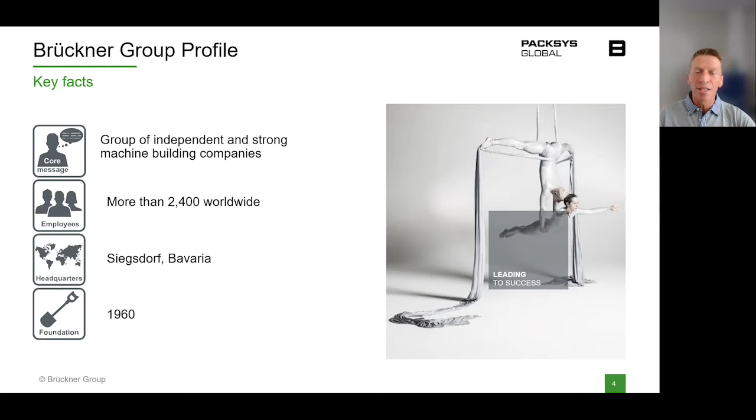And I'm pretty sure all of us are on a daily basis in touch with the products made out of the Brückner Group machineries, whether it's for electronic components, cosmetics, healthcare, personal care, food packaging, and last but not least, also for beverage packaging.

PackSys Global, one of the 4 companies in the Brückner Group, has 4 divisions. We have been in the business for about 50 years, and not long ago we set up the new division organization. So we have the divisions Health and Pharma and Premium Cosmetics, mainly in the tube sectors, for decoration as well. Then we have Beverage and Specialties. That's where the closure business belongs. And we have the 4th division, which is the customer service for all the 3 other divisions.

We are globally set up. We have our platforms in the US, in Portsmouth, New Hampshire. We have in China, in Suzhou, our platform. We have in India, in Mumbai, our platform. And then we have representative offices in Japan and Brazil for the Latin America and Japanese markets respectively.

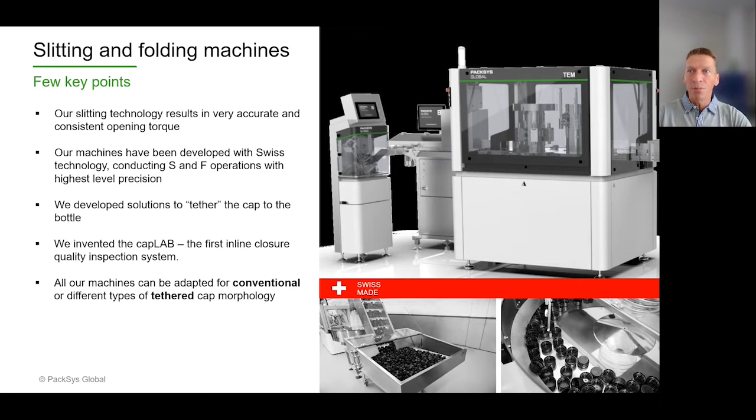And of course, as I said, tethered closures - we had to find a way so all the existing equipment can be adapted also to tethered. That was the driver for us to develop technologies which we call today experTether, smarTether, and CapCompass. With these 3 technologies, we are able to serve the tethered market on a good platform, whether it's for oriented slitting, which is Cap Compass, Smart Tether as a hybrid solution, or experTether, where we have contour slitting. So whatever contour we want on the TE band, forming a hinge, creating a tamper evident band, that's the technology to go with. This is exactly what we implement in the machine at TEM, which we have at Drinktec.

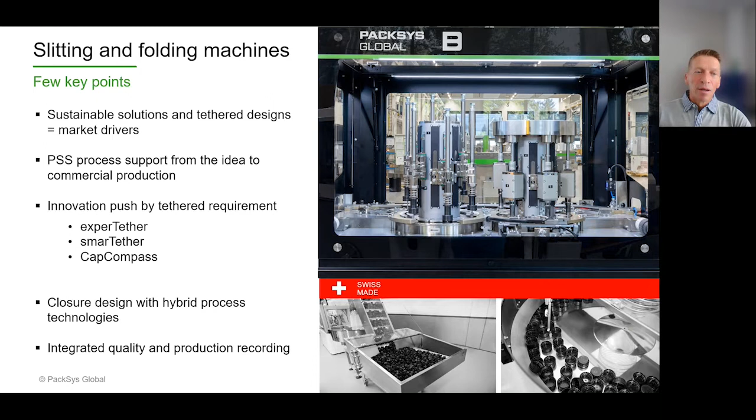When you talk about closures, tethered closures in particular, we talk about all kinds of closures which come in various shapes, but the main functions remain the same. The sealing should be the same. We want to prevent entry of any micro particles, and protect against CO2 loss. And of course, the tamper evident band needs to be there as well, with the same functionality as we know from today's non-tethered closures. But the consumer experience also wants to have the same behavior - with the grip zone, the radius, all this convenience, it should flip away in the right direction. Since it's no longer detachable, it should be in a convenient direction to get out the content.

And of course, the industry, the manufacturers, they want to have their requirements met. The investment should be as low as possible to transition from standard to tethered closures. For the filling line, it's important to have not a major change in the capping process. Efficiency and zero defects - all these factors are highly sensitive for the converters and for the filling lines.

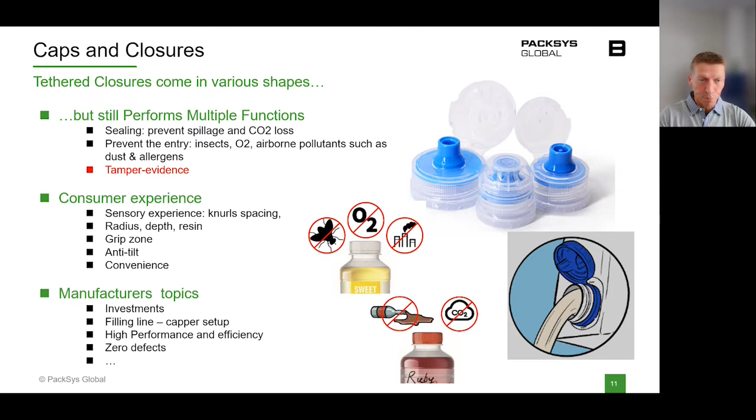Today we know two technologies. On the left-hand side, we know the slit hinge. On the right-hand side, we see the molded hinge. This is the product from one of the global major brands. On the left-hand side, we have a 500 ml bottle, whereas the other one is a 300 ml bottle. So it's obvious there are different technologies possible.

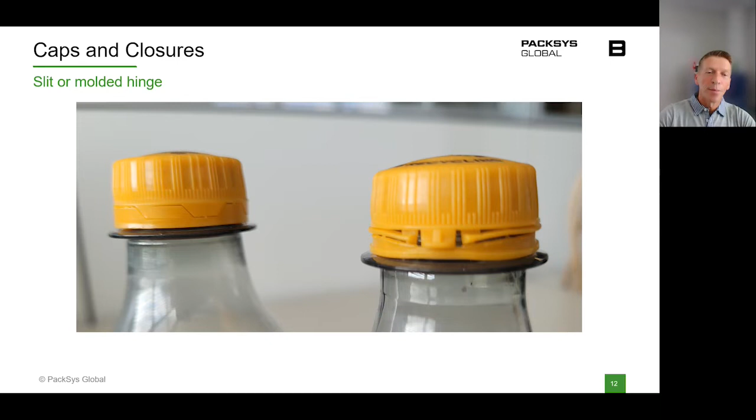Let's talk about the technologies first, about Cap Compass. That's what we developed mainly for the carton industry, for multi-piece closures which are assembled with a cutter, with a spout, or just with a spout. It requires a defined hinge position, and this is what we do with movable spindles. We go inside the closure. We have the orientation sequence before we then start with the cutting right at the point it's foreseen, or it's ideally positioned.

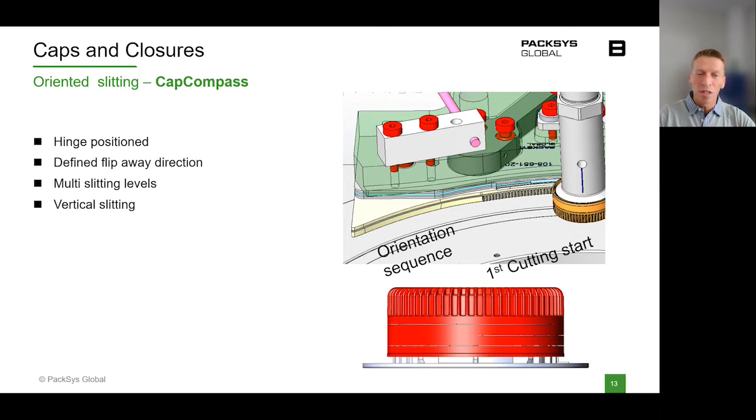It's possible to have this with vertical slitting, multi-level lines, 3 lines, 2 slitting lines, whatever is needed, we can handle it. The second is experTether, and the experTether, that's a technology 5 years back really nobody was thinking about, where we have the contour slitting. So each time a mandrel passes along the outer tooling, the slitting knife, it's fully synchronized.

We know it from high-speed machines, where we've delivered a good number of machines which are in commercial production already. This is the most seen technology today we deliver in the market for the beverage industry, for PCO 1881, for the GME 30 point whatever. This is the future.

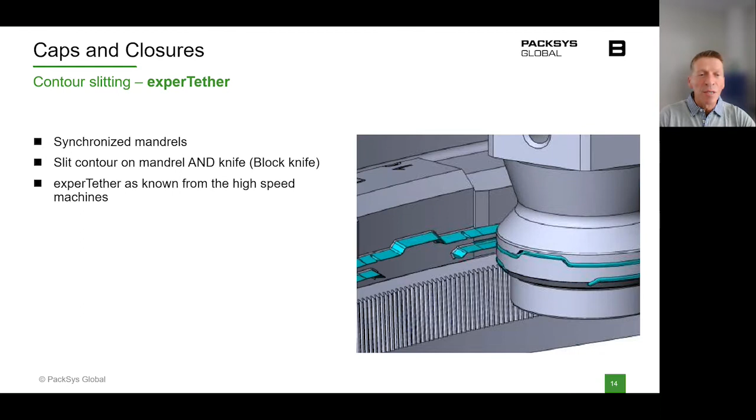A big advantage is with the third technology, smarTether. So Smart Tether is kind of a hybrid solution between Expert Tether and, let's say, the standard we have today. It allows our customers to run the same closure design for tethered, but also as a standard. The changeover from tethered to non-tethered is done in 3 minutes. Changing the knife, it's there.

It's thanks to the modularity we have in our machines, we have a very, very quick and very low cost, or low investment, changeover between the two solutions. The same closure design, but different technology in the slitting process. This for sure is a big advantage if we go with post-molding slitting compared to the slides in the mold.

So the TEM Plus in general, I have to highlight again, we have one knife that cuts all the closures coming out of whatever it's a 96, 72, 64 cavity mold. We have one knife that forms all the bridges. We are very flexible on that machine with the sequence. In the field we can switch between folding-slitting, slitting-folding, or just slitting or just folding. That's a modular machine base where we have all these opportunities.

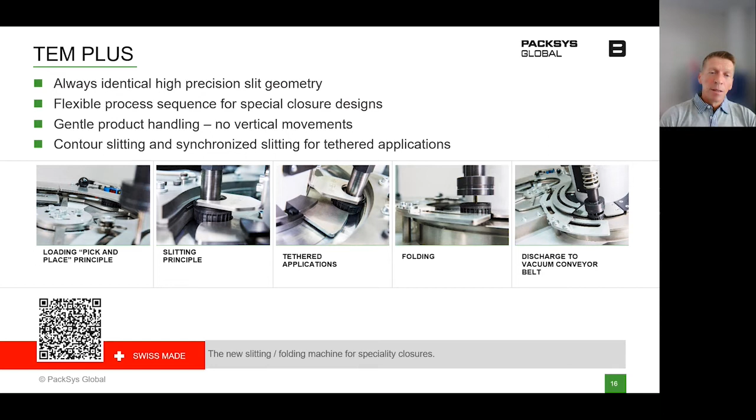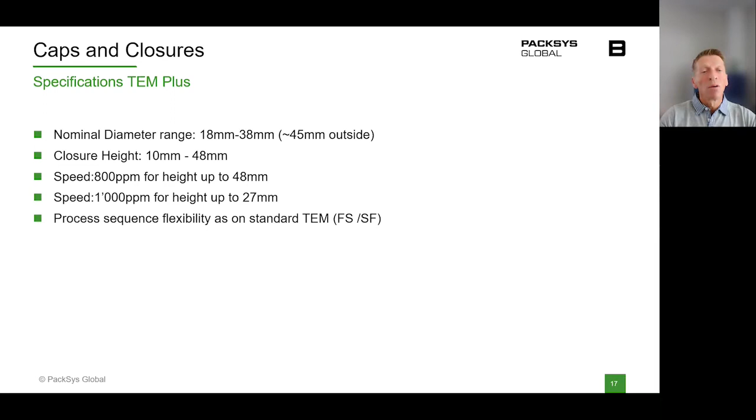It is a very gentle product handling, so the closures going inside the machine are not moved in a vertical direction. In other words, we are moving all the spindles. That's the principle on the TEM machine. The specs for that machine we are displaying at the Drinktec: we have a nominal diameter up to 38. I think that covers most of the beverage container closures. The height is there. We have different speed modes. The process sequence, as mentioned, is very flexible, whether folding, slitting, or whatever is required.

The second point we will display at the Drinktec is CapLab. Okay, some of you might say, hold on, that's the device you displayed at the K. That's correct. 3 years ago, we were the first in the market having this testing device in line with closed loop operation, feedbacking to the molding machine whether we are in the target range or not with the band breaking strengths.

We have various patterns, whether it's according to the cavity or according to the spindle of the slitting machine when it's slit, or by time, by volume, all is adjustable. We can adjust the pattern, whatever is needed. All the measuring data are transmitted to the system. Either we provide the platform, but more often there is already a system in place in the manufacturing hall.

The big advantage, why did we bring CapLab onto the line? We always have the same conditions. So the crystallization of a closure is at the same level. The temperature of the closure is at the same level. And we are independent of the mood of the operator in the lab, where normally these tests are done. We interviewed a couple of manufacturers to see how it's being done, and we found out there is a big difference between the individual manufacturing companies in plastic closures.

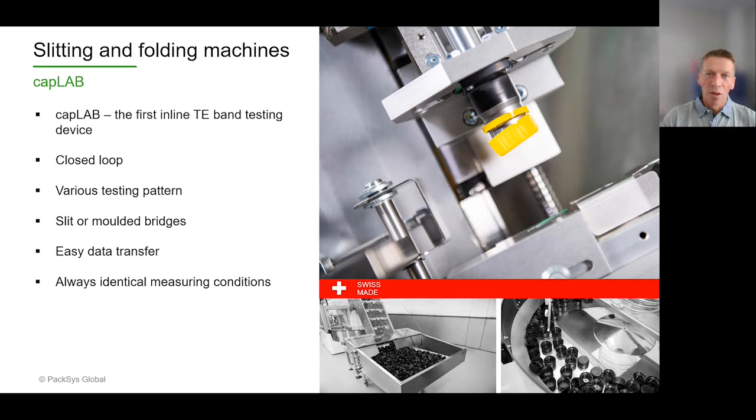So just generic, what we do, we have a feedback to the injection molding machine when we just would run without slitting. So we would feedback, hey, cavity number 32, there is an issue. The strength is not in the target zone. So it can alert the operator to close the cavity or do maintenance work.

Or we can feedback to the slitting folding machine and say, okay, spindle number 4, there is an issue. We should think about it and measure it again or whatever. So we have all these analyses. If in general the strength of the TE band separation is getting too high, we can increase the temperature of the knife and bring it back in the target zone. So we have this closed loop feasibility to run the line without human interaction.

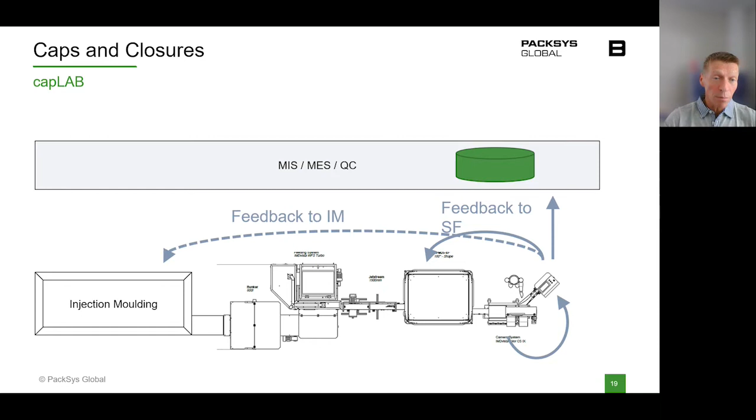So this is what we had, and this is what we keep. We just thought, okay, let's go with CapLab Plus, and we did some more processing or testing methods. Some measurements are done there. So of course, tethered was, when we started with CapLab, not the major goal to implement. So today, I think we have to. Tethered is the future, at least in the European market. Let's see where the journey goes on after Europe has converted in about 22 months.

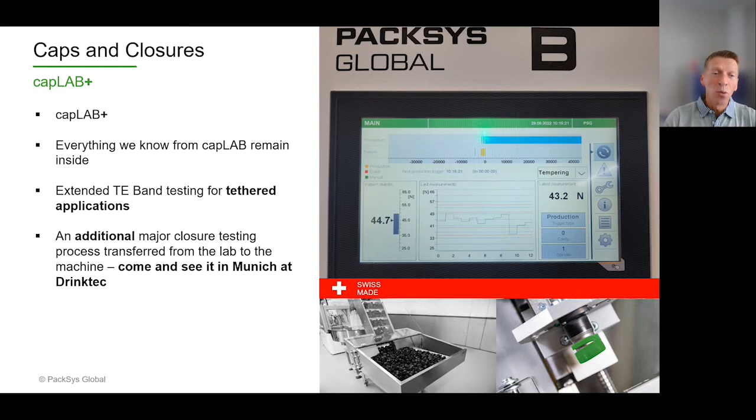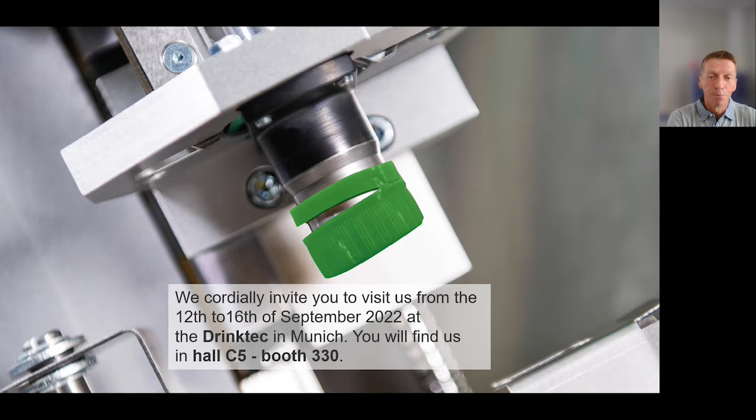Thank you, Uli. That's very interesting. And as you say, I think sustainability is the main driver today. I expect we will hear more about it, not just today, but over the coming weeks, months, and years.

And now for our second presentation, I am delighted to introduce Mr. Jacopo Bianconcini. Jacopo joined Sacmi Group in Imola, Italy, 21 years ago. He graduated in management engineering at Greenwich University in London and added a master's degree in marketing, innovation management and digital transformation at SDA Bocconi of Milan and Columbia University, New York. After gaining experience as an area sales manager and key account manager, he is now based in Sacmi's Imola headquarters, where he is directly responsible for marketing and product development activities within the rigid packaging technologies division. Jacopo, we're very much looking forward to hearing what you have to say today.

Over to you. Thank you, Ruari, and hope you are hearing me properly. If there is some noise, it's raining cats and dogs here. Italy is said to be the land of sun. It was in the last 3 months, but not in these days. So I'm just trying to take control of the presentation, which I guess is working perfectly.

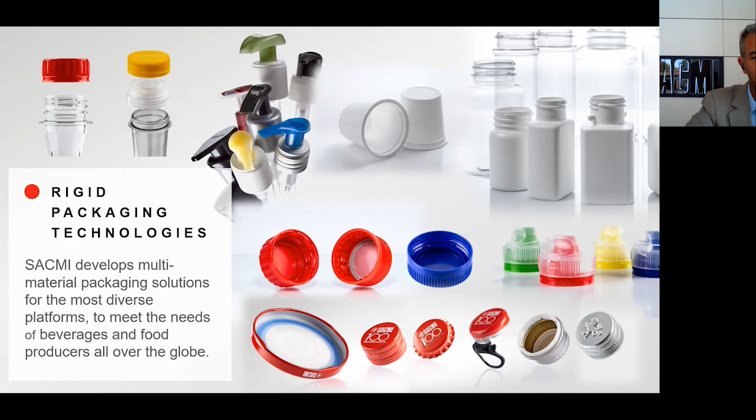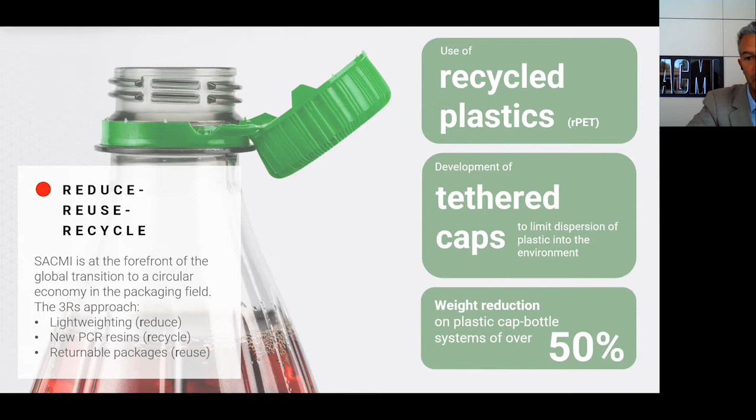Again, sustainability in our industry is known in view of the 3R, which is reduce, reuse, and recycle. We will show at the exhibition how we use rPET recycled plastic in our injection preform systems. There will be a section at Drinktec only on tethered caps and on our slitting solutions, like Uli presented before. Not by mold, by slitting. And also our lab, certified by the major brand owners, which designs preforms, caps and bottles, and is aiming at a really important weight reduction. We reached about 50% in the last decades.

But focus on what we will show at Drinktec. The presentation title is How to Translate Digitalization in Closure Manufacturing, in this case, into a real economic advantage. And there are three main topics. One is the generation of data, one is elaboration of data, and one is how to turn this into profitability. So let's start with the generation of data, which is the section on which I will spend most of the time of the presentation.

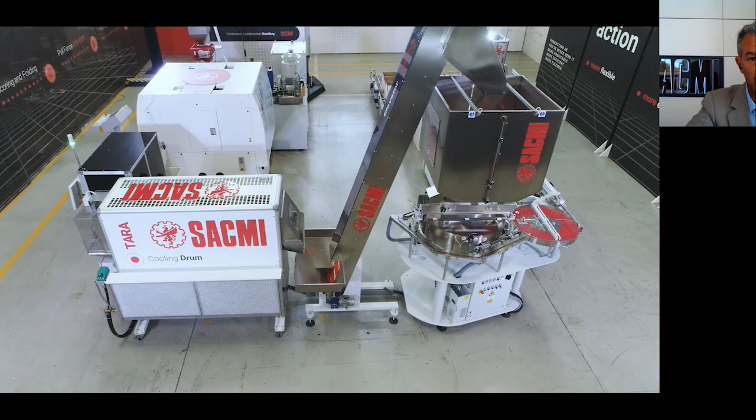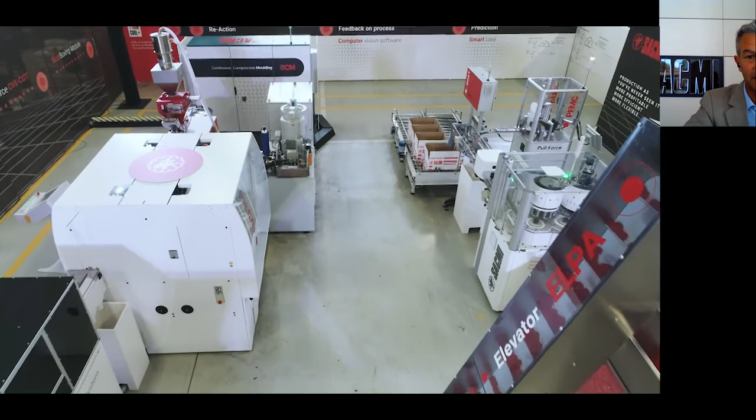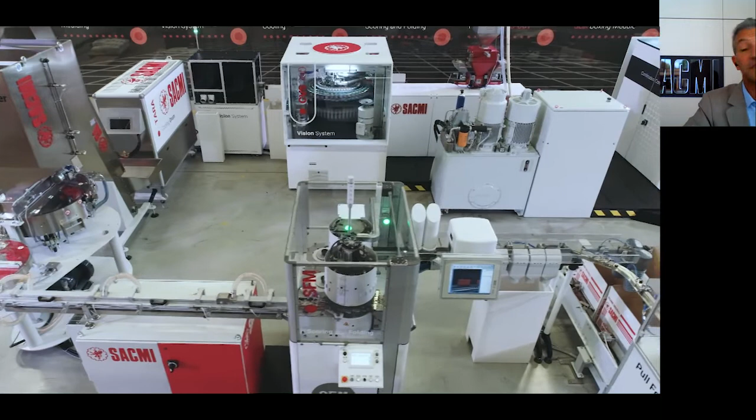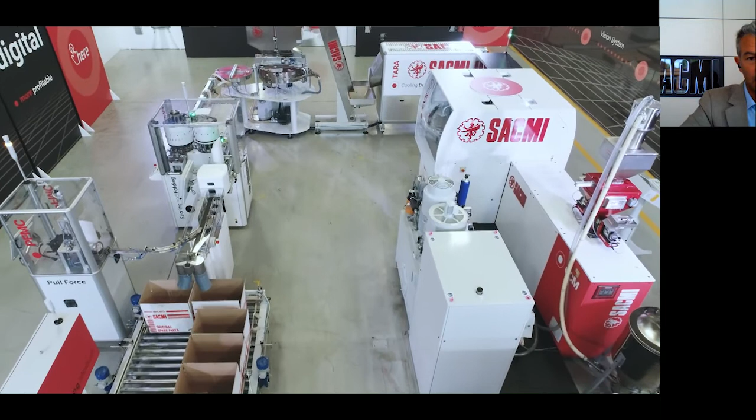What we are talking about is this line which you see here. This is exactly the line which will be presented and working, actually producing caps at Drinktec. How it works is the production of plastic caps by compression. You have an insertion turret, which takes the pellet dose from the extruder and puts it into the main turret, where it's actually molded and cooled. Then it goes all the way down into the scoring and folding process. Again, this is the machine we will have at Drinktec.

How to generate data: through a package which we call the Smart Pack, which is a sort of onboard hardware and software which maximizes flexibility and real-time adjustment of the machines according to the data and the process they figure out and detect during production. It's a package which comes as a whole and consists of four main aspects of the process. One is the pellet insertion, which in compression technology is a key area. One is advanced management of materials control.

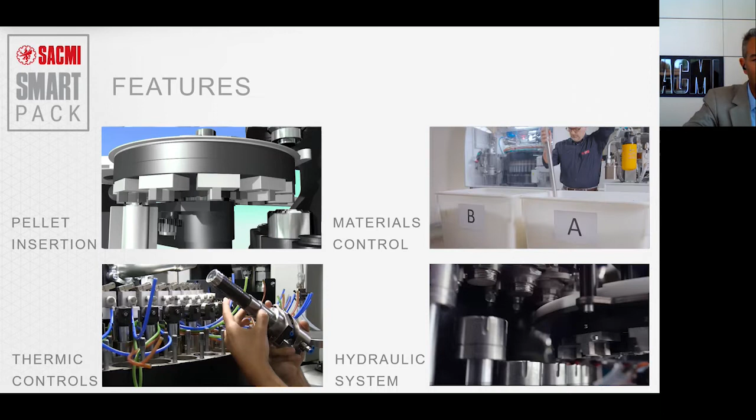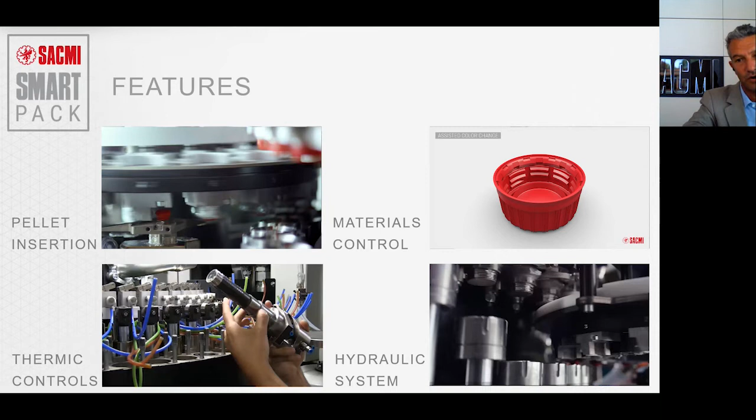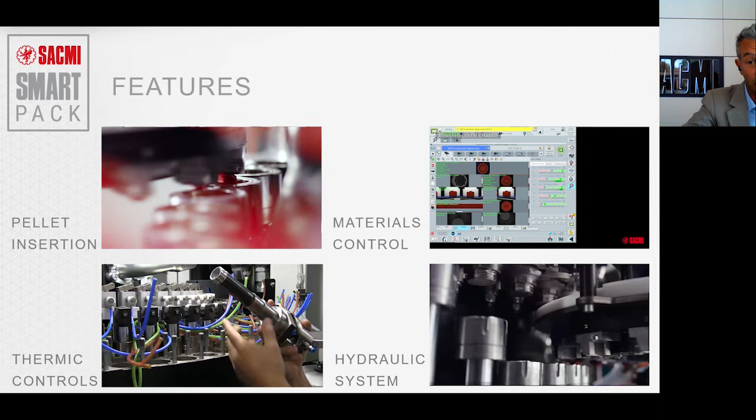We will also perform at the exhibition how, changing from one material to another, the machine actually detects the material automatically and then sends an alert. Then we will talk about thermic controls, the temperature control system in the mold and in the machines as well. And on the hydraulic system, we all know that oil is sort of the blood of the machines, and it is very important. We have systems able to detect in real time in the machines if there are particles, the chemistry of the oil, and we'll talk about this later in this presentation.

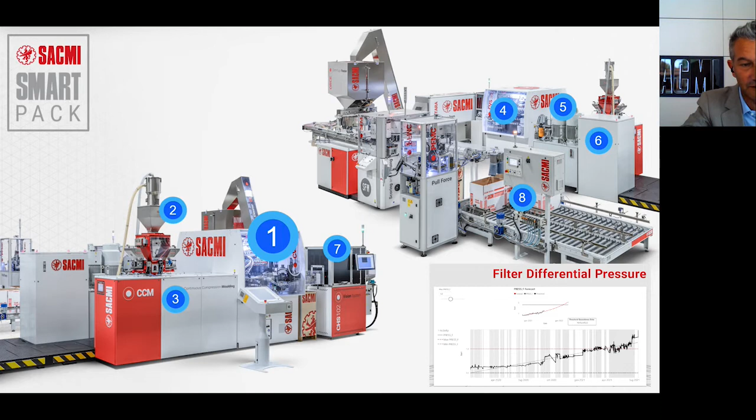So let's start with the pellet insertion. If hopefully the presentation will move forward. Here we go. There is a video also here.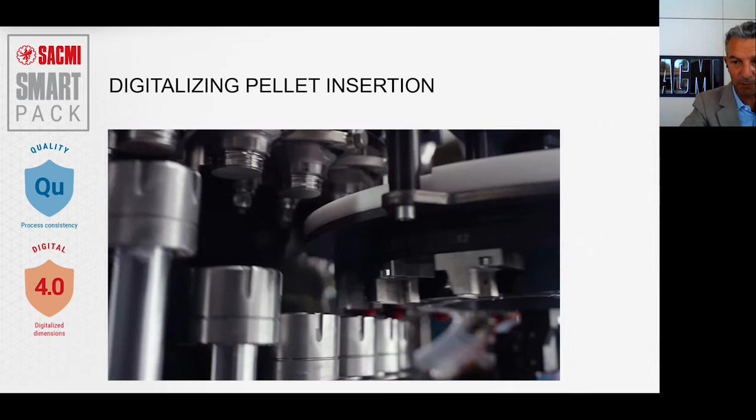So it's like playing basketball. You have a ball and you have to throw the ball in the basket and hopefully center it. This is the target of the insertion turret. We have a set of positions that, with a pinhole and compressed air, take the dose cut from the extruder and place it into the mold. Here we are able to digitalize the position of each dose in the mold. This means that you have statistics and behavior, and you can detect if there is a drift in the process and act before the problem occurs.

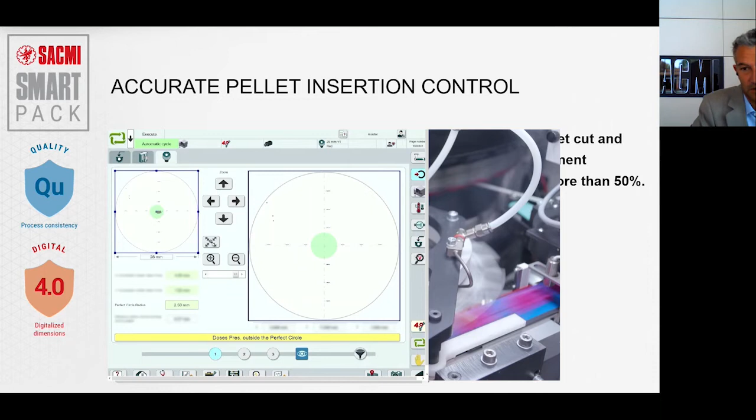We have real data that, especially when you have to change materials on the same cap or colorants on the same cap, or even change the size, you have a complete changeover of the caps, then there is the process of setting the parameters. Okay, you have your recipe downloaded in the machines, but always you have to check that. With these sensors and knowing exactly what you are doing in the machine, and at the same time what is happening in that part of the machine with these actual controls, you know exactly what is happening in real time

and adjust correctly. And we discovered that you save half of the time in the setting time moving from one recipe to another one. What does it mean? Less scrap, more production, more money at the end.

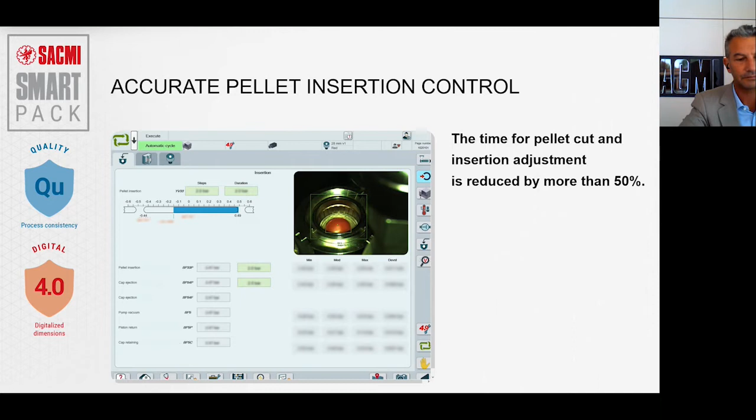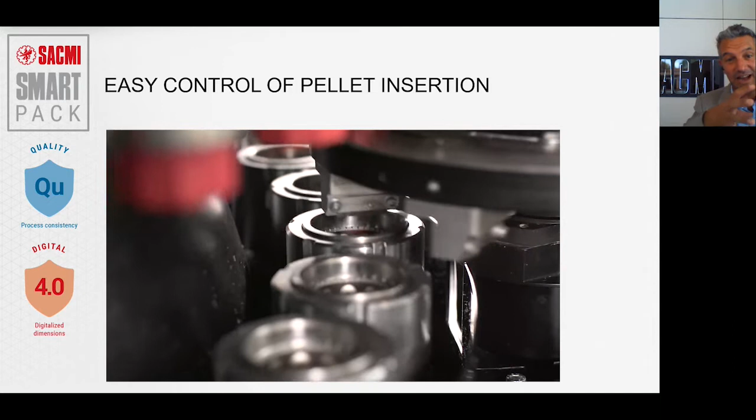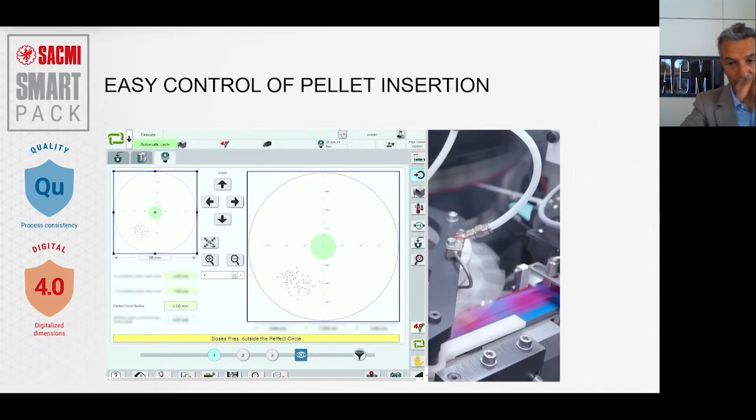Again, easy control of the pellet insertion. Here, with this video, we will show how you can spot a complete drift, not only in one position of the insertion turret, but something happening as a common parameter in the process. You see that all those from every insertion point are drifting away from the center. So something is happening. Maybe there is something wrong in the insertion time, something wrong with the speed of inserting the dose. And again, you are actually knowing what is happening in real time, make an intervention and solve the problem, because you know in advance what is happening.

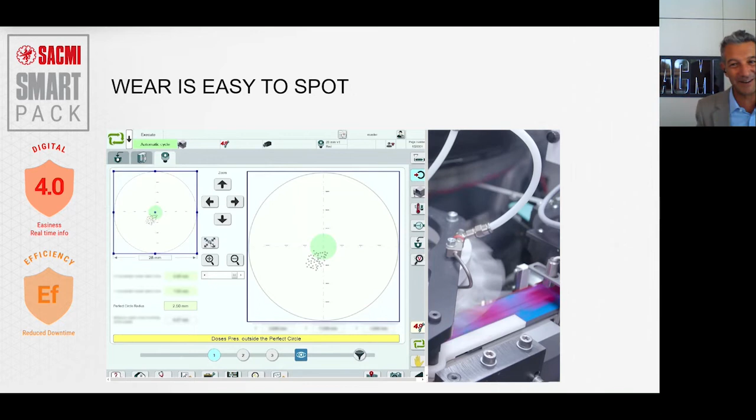This has to do also with the wear of materials. I cannot be precise here because we have a patent on this and it's a very important know-how we have. But I can tell you, it has to do with the pressure of the chamber of the pistons placing the dose down. And we actually can know exactly which situation is happening and if there is wear or not. So we can act on this, moving the time of the intervention for maintenance. It can be earlier than foreseen by the manual or later, hopefully later. And we'll see how this can have an economic advantage later on in the presentation.

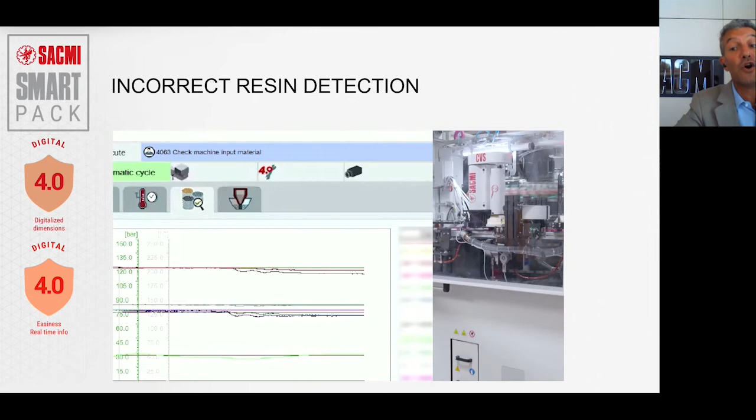So we leave the pellet insertion. Now we move into the following section, which is very interesting: incorrect resin detection. This is what has actually been done in real terms, moving from the hopper from one resin to the other resin. It's an algorithm patented by Sacmi. It has to do with the rheological properties of the resin, and the machine detects that it is not the same resin as in the recipe and gives you an alert. So again, you know exactly when the problem is happening, and you don't waste scrap, time, or production, and again, we are back to economic advantage.

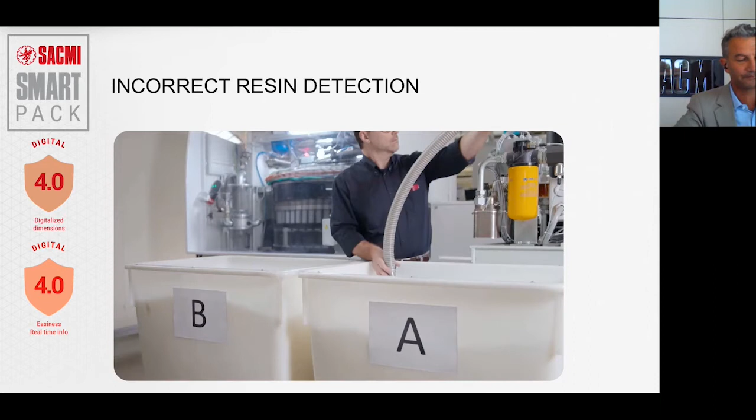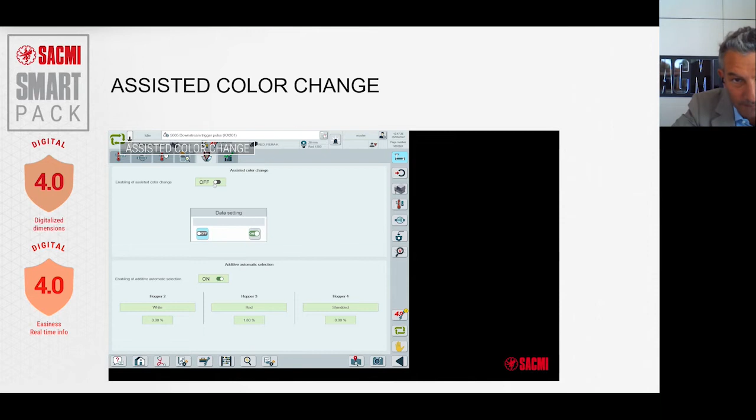Color change. Our technological and technical department prefer to call it assisted color change. I will call it automatic color change, provided you have the proper material and the proper color in the hoppers. But then just by pushing one button, I'll show you here, exactly that button, the machine automatically performs the color change.

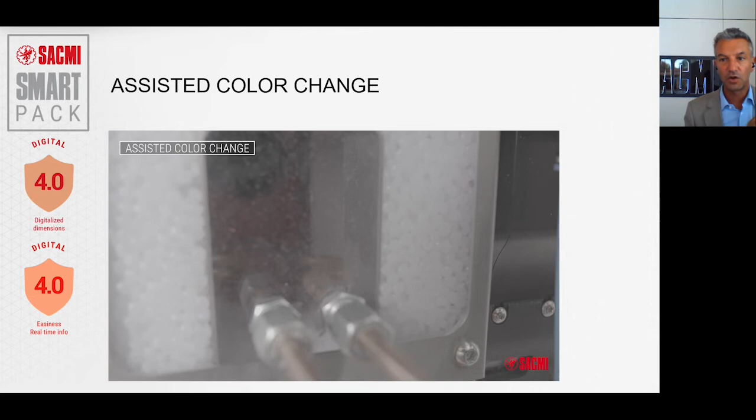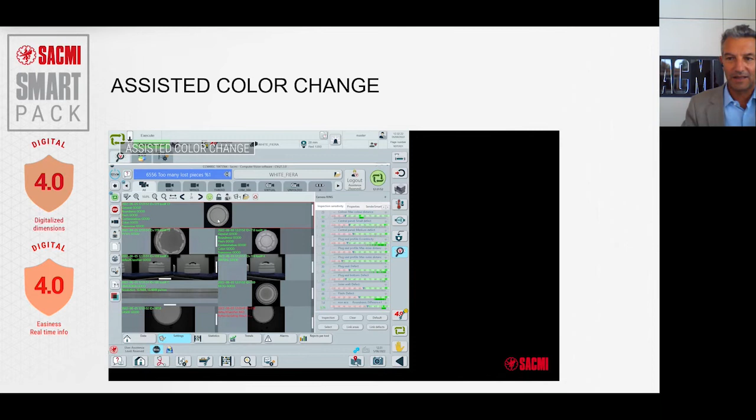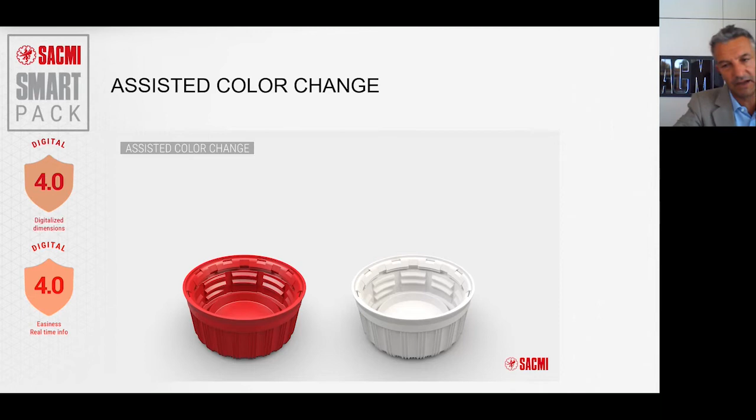The continuous compression molding machine actually works in conjunction with the computer vision systems which detect the color of the caps, the transition of the color of the caps. So the caps go into scrap, taken out of the production line, but then automatically the machine detects when the color and the dimension of the caps and all the data of the recipe are met. And in that case, no more scrap, automatically back into the production bin. So again, you save a lot of time here and no errors, no human errors.

Two other parts on data collection are important. As said, the oil is the blood of the machine. So we have sensors and devices to analyze the quality of the oil, both in physical terms, dust or whatever particles, and in chemical terms, so the decay of the oil. And again, by analyzing this data, it is possible to properly program the maintenance intervention, knowing what is happening. Maybe postpone it compared to the table, because it depends on how many hours of production, which kind of caps, the maintenance done before. A lot of data. You know exactly what is happening in the machine in real terms.

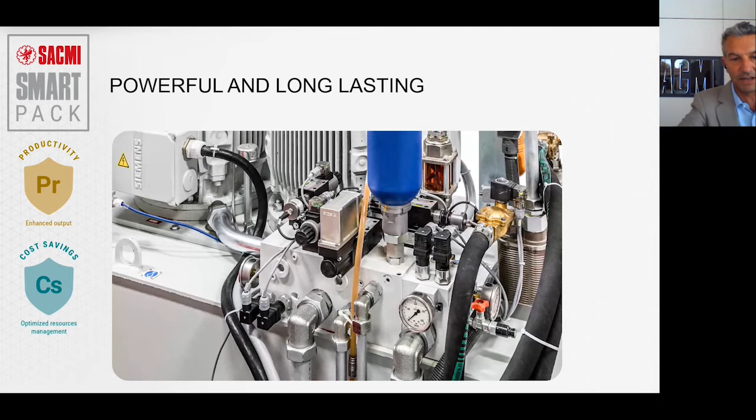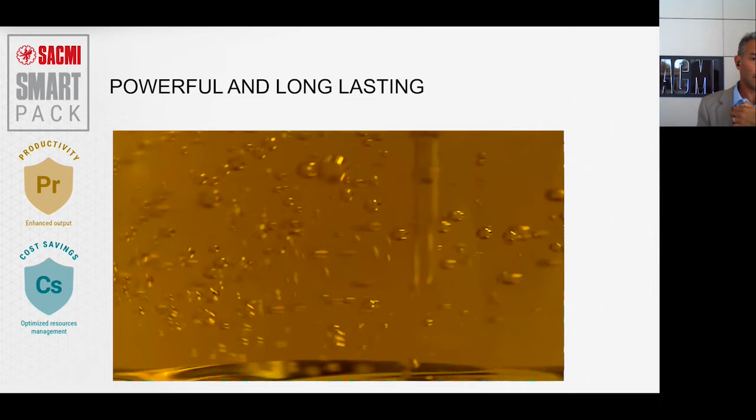Finally, on collecting data in a rotary machine, the rotary joint is, again, a key point. And we have, again, sensors and systems to know exactly the health of all the gaskets.

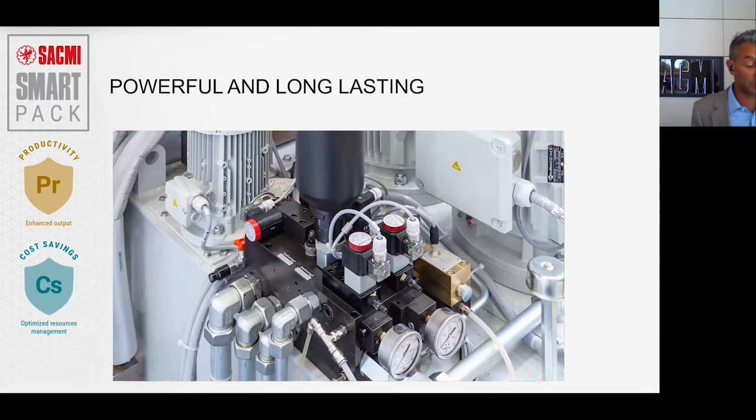So to check if there are leakages and how the situation is, again, to program the maintenance. It's important here that we have a system also for the accumulators. If you see that you are losing pressure from an accumulator, it means that something is happening there and you can intervene before the problem occurs,

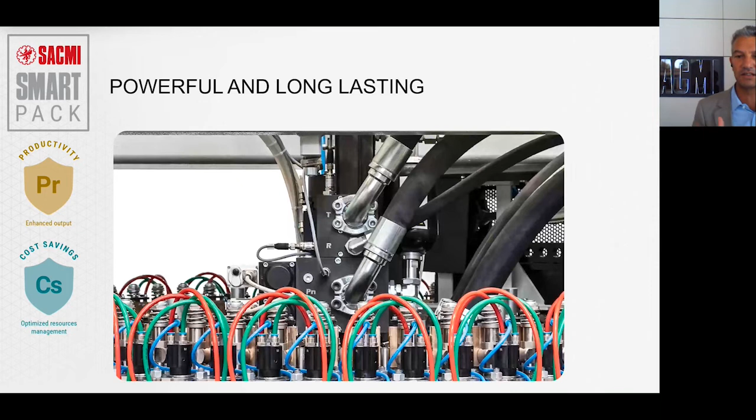and we have some evidence that sometimes there is something going on in the machines, and you have to make a lot of tests, a lot of trials to know what it is, and then you discover it is an accumulator. With this Smart Pack set, this is a problem you will not have anymore.

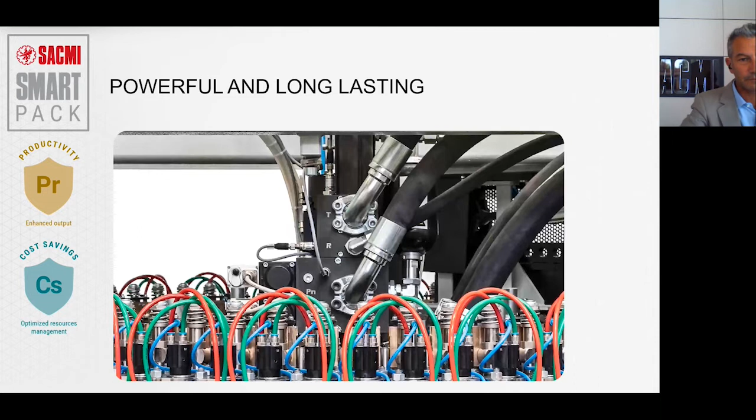So far we have spoken about how to collect the data, but how to elaborate it? You have to properly use a system of machine learning, artificial intelligence, which we have patented, and it is all in the cloud. On top of what you can get from Smart Care in real time on the machine, which we spoke about earlier, with this system you can have a sort of prediction of what is going to happen in the future in the machines.

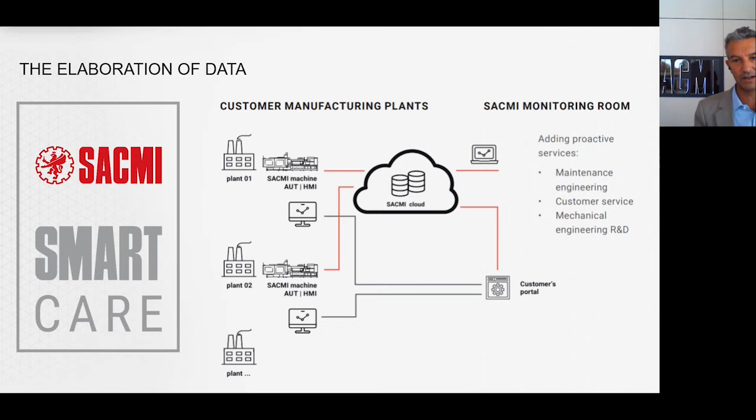The more you use the machines, the more data you get, and the more accurate the prediction is. On top of that, you can get data-driven decisions. Again, here is exactly what I said: collection, long-term trend and monitoring, data processing, predictive maintenance alerts, and also the KPIs. You can set the KPIs you want.

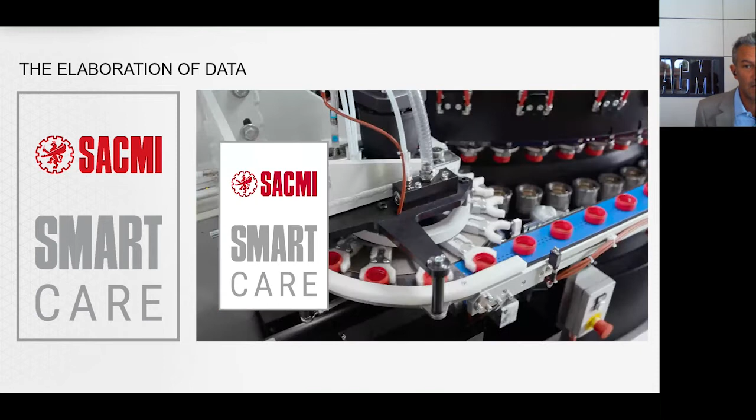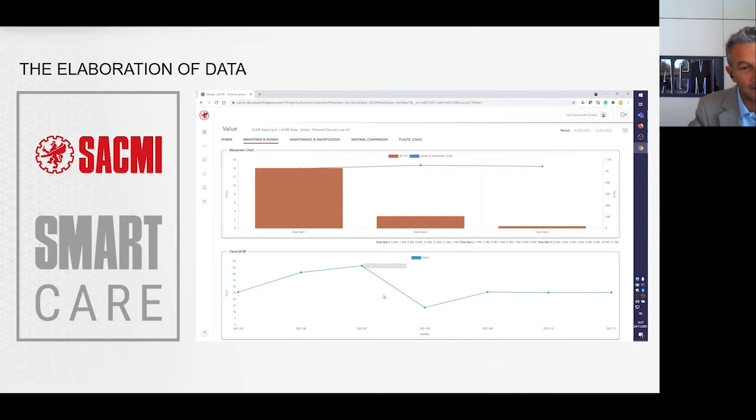It's important to notice that you can forecast, as said, future behaviors, but also get analysis of the data you had. I would like to focus on a specific case study, which you'll see better in the next slide. You can compare the same cap, same machine, same production, with two different resins. In this case, we have two different resins.

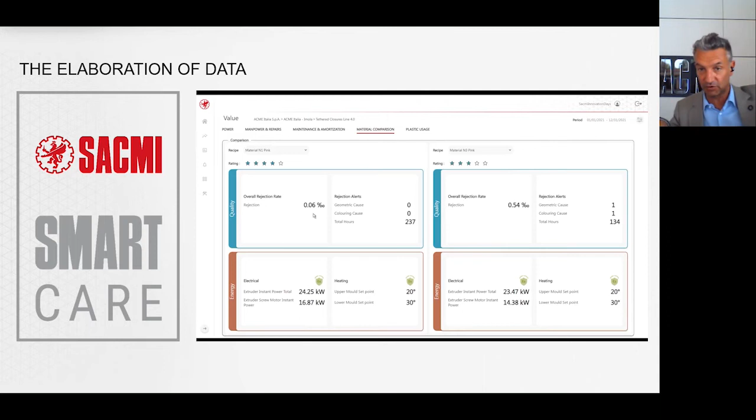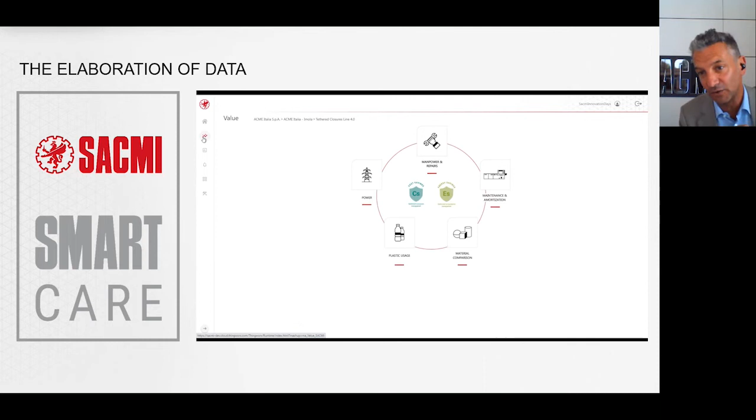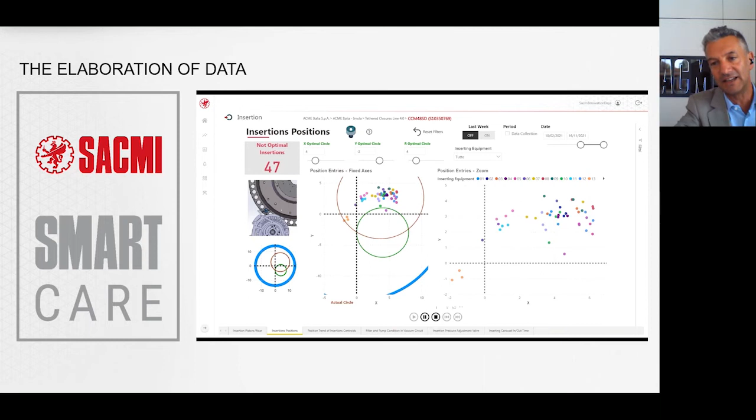Then you have the consumption of the production line with one resin or the other, the scrap rate with one resin or the other, same cap, same production rate, and adding the cost of the resin, which you know, you can analyze what is more convenient to use. So which material is best for that particular cap, which one gives me higher performance or lower costs, and with this set of data, it's easy to make these smart decisions.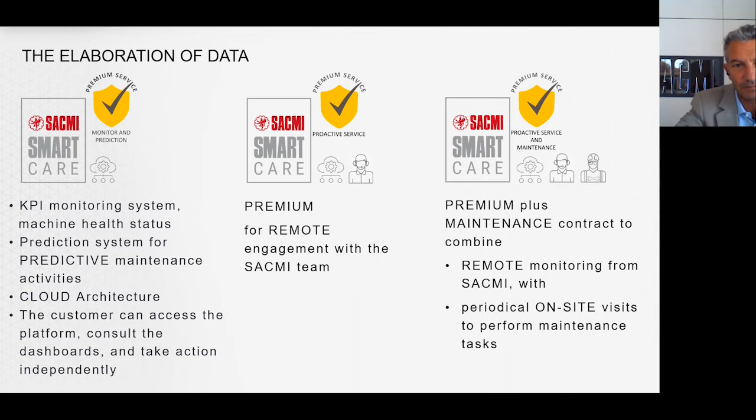We already entered into this topic. I have just the final two slides on this. Case study: I cannot disclose who the customer is, where, or on which machines. Anyway, it is a continuous compression machine. We took two years, 2021 and 2022. Every 15,000 hours, more or less, we have to run a maintenance program.

They have two identical machines with the same product, one with data from Smart Pack and Smart Care, and one standard. With the Smart Care one, in these two years of main maintenance, they saved 22% in employee time, 20% in spare parts, and 58% in not losing production, so more efficiency.

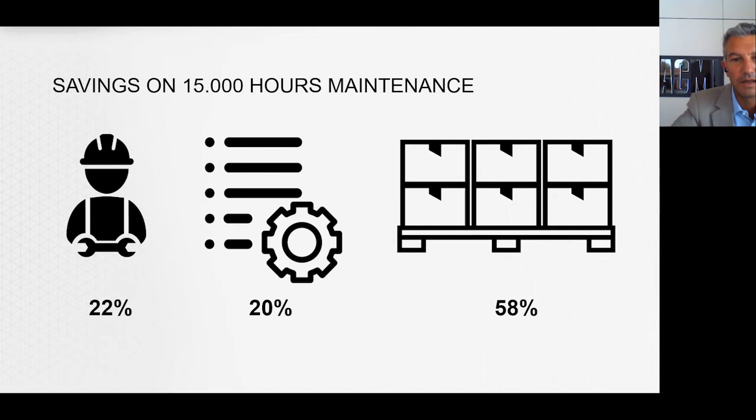It really depends on the type of machine, the caps, the hours, whatever. But I can tell you that in this case they saved more than 20,000 euros in just one maintenance program. This is what I showed before on raw material savings and comparing the resins. This is a real case.

With two resins, with one you have slightly lower energy consumption, but 2% more scrap. So again, it depends on the cost of the resin, and according to that, you can make the decision.

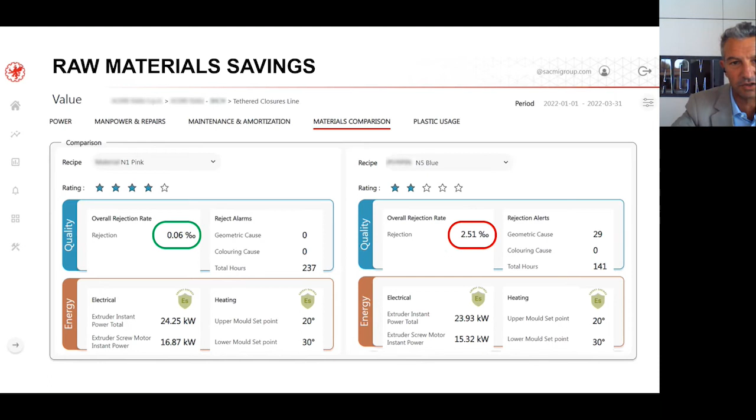Jacopo, thank you very much indeed. I noticed that you said 15,000 arias rather than 15,000 hours, just there, very Italian. 15,000 hours. 15,000 hours. I thought 15,000 arias. I thought how very operatic, how very Italian.

Anyway, you're absolutely right about sustainability. As it happens, I've just written a white paper for a technology company that has a section on sustainability, and they too were very keen to emphasize that commercial sustainability is vital as well as environmental. And if your company is the green dream but goes out of business, it doesn't really do anyone any good. The point that you made about effective monitoring and maintenance being key is very well made and very pertinent.

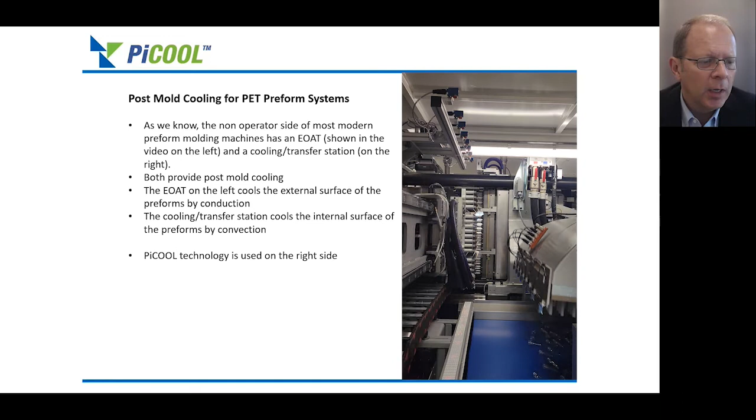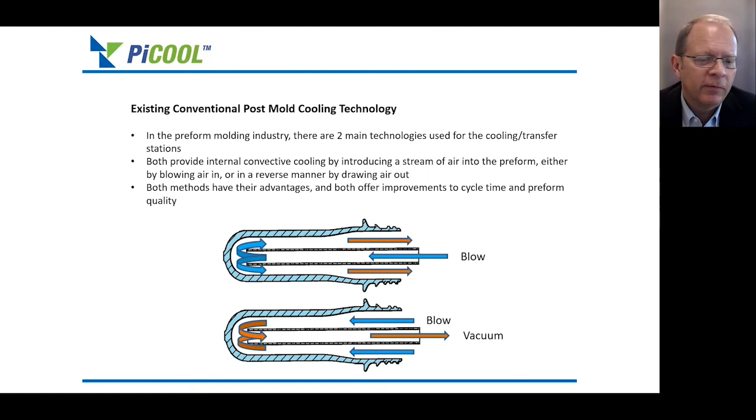But before I get ahead of myself, I just wanted to define terms. As I reference conventional post-mold cooling, what I mean by that is obviously including the end-of-arm multi-position takeoff plate, as well as a set of blow pins. And when we say conventional, what we really mean is that either a simple pin is inserted into the preform and compressed air is blown into it, and it exits cooling the inside of the preform in a linear fashion, or it is drawing a vacuum, and again, the air passing by the inside of the preform is moving effectively and typically in a line before it is sucked into the tip end of the blow pin. And PiCOOL works differently from that, and we will elaborate in a moment.

Here are some images of a hot PET preform, and the images are taken seconds after being molded, and we're showing 4 different views while rotating the part by 90 degrees between each picture, and it's quite apparent from these images that the amount of heat in the part is not consistent as we look around the perimeter at a certain elevation, and then as we look up and down at different elevations from top to bottom of the preform, it also is apparent that the temperature of the part is not consistent. And of course, everyone in the business is familiar with the kinds of challenges that can arise when there are inconsistencies in temperature, as shown in these pictures.

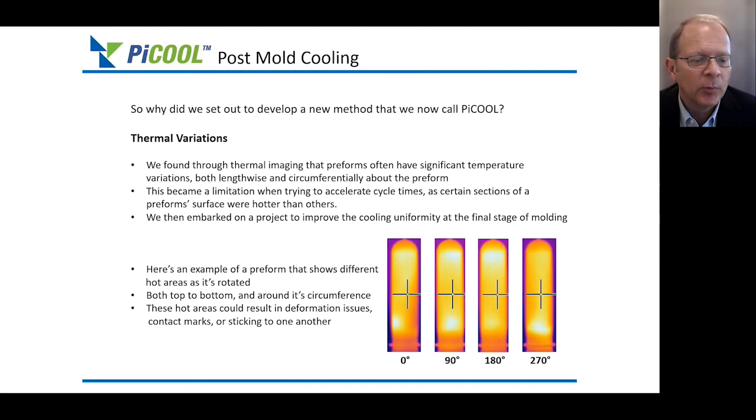And I also want to mention for these images, these are taken of parts that have just come off of our development cell running an 8-cavity developed PET preform mold, and was done in basically an R&D lab setting.

So PiCOOL is different from conventional blow pins in that we are using a special fixture that is near the mouth of the preform, and it induces a spiral pattern on the air, whether you may blow in through the blow pin or provide suction like vacuum, as is shown here in the diagram. Whether you go in either direction, we effectively have some little vanes, not unlike a jet turbine, that induce a rotation on the flow of the air inside the preform. So it is moving very differently than in the conventional case.

The diagram is quite simple. StackTeck, by the way, was granted a patent on this technology in 2018, and this is still a relatively new technology.

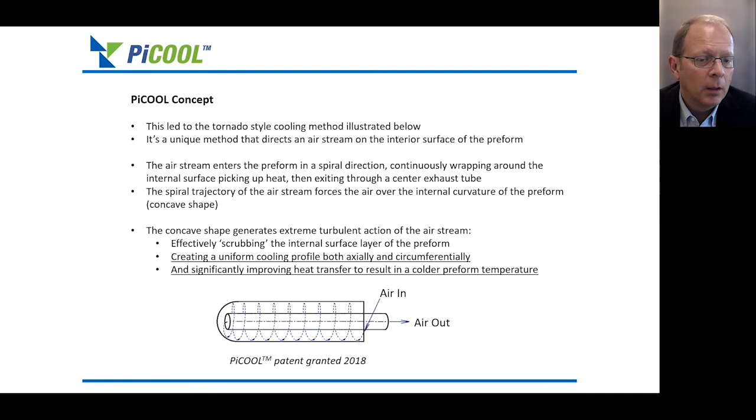Now I'm going to show you a video where we are manually holding a preform over a PiCOOL pin assembly, and you're going to see, because we have put some liquid droplets inside the preform, it will enable you to see the pattern of the air going inside. The angle of incline of these droplets moving in the preform is roughly at about 45 degrees, give or take. And that, of course, changes the nature of the degree of turbulence going on inside the preform.

It also makes for more consistent cooling around the perimeter because the same air is traveling around and around the inside of the preform before reaching the tip of the blow pin, or I guess I should call it a suction pin in this case. So that is what is new and different with this technology, and why is that important?

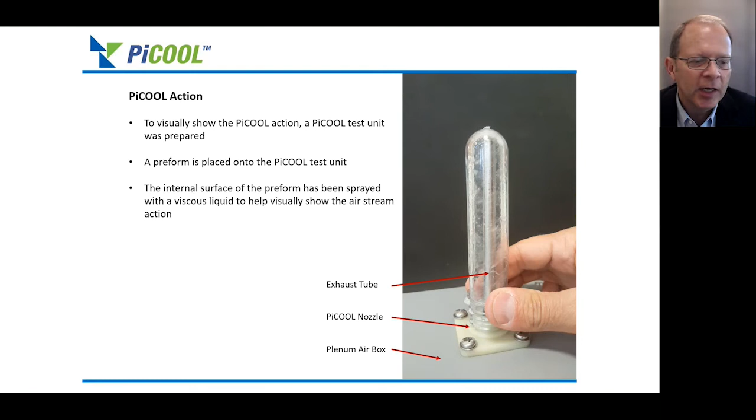Going to first talk for a moment about that video I showed earlier on. It was a 96 cavity system. It was a 96 cavity StackTeck preform mold running in a Netstal PET line 4000 system. As you can see here with this pin plate, we have 3 positions at which we are blowing, and then a 4th position which is strictly for ejection in the 4th stage before ejection.

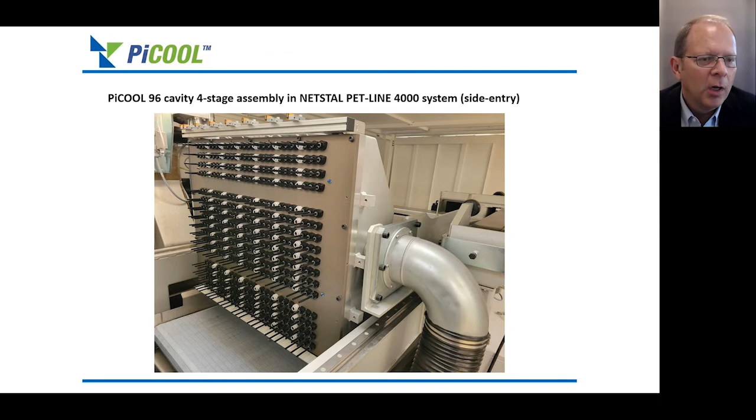And I want to touch on a first case study of 2. In this case, it's a 42 gram preform with a wall thickness of 4 millimeters that has a base cycle time of 14.9 seconds. And we're showing in the images with 1, 2, and 3 stages the conventional technology as compared to PiCOOL, and the temperatures, which I'm not sure if you can read them, but the end of the first stage with conventional cooling, this preform at the location shown is 94 degrees Celsius, whereas PiCOOL is 87.5 for a difference of 6.8 degrees Celsius after 1 cycle of post-mold cooling.

At the end of the 2nd stage, it's a larger difference, and by the end of the 3rd stage, running at the same cycle time, the preform is 15.7 degrees cooler, and this is strictly the result of changing out from a conventional blow pin to a PiCOOL blow pin in the same system, running the same material. Everything else is held constant.

And so, of course, as we saw this improvement with the technology, we then moved to reduce the cycle time, increase the productivity, and we were able to compare to the 61.1 degrees Celsius at the end of the 3rd stage of cooling with the conventional pin. And once we had reduced the cycle time by 2.2 seconds down to 12.7, that temperature at the end of the 3rd stage of cooling was at 59.1. So still just slightly cooler than the conventional case, but running significantly faster at 12.7.

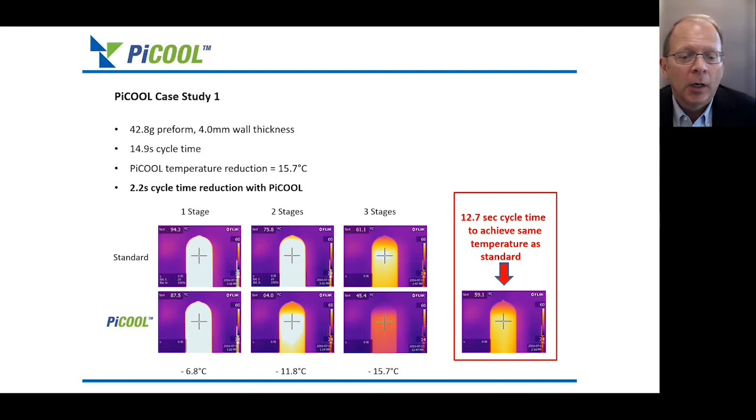I have a second case I'd like to review. This is for a smaller preform, just to show it's not just a one-off case. In this case, it was a 72 cavity system for a 16 gram preform.

In that case, we went through a similar process, and while maintaining the exit temperature that we had been at, we were able to either at the same cycle time reduce the temperature of the preforms by 9.4 degrees, or conversely, at the same temperature, we were able to reduce cycle time by 1.3 seconds, and again, a substantial proportion of the cycle time, going from 10.98 seconds down to 9.64.

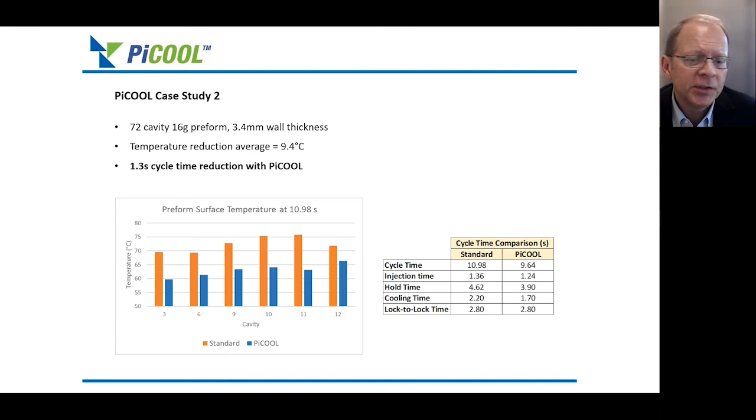And so as a general rule with the PiCOOL technology, we have found over a variety of different applications that the overall savings using this technology, in our experience so far, has been in the range of between 5% and 15%. Whether the higher end or the lower end of that range, bigger is better, of course, but even at 5%, that's a substantial change and improvement, considering that we're not really changing that much in the system. I will also mention this is a technology that can be used on existing systems with relative ease.

Thanks, Jordan. Thank you very much indeed. Sorry if I look slightly distracted. It's because I've been dealing with a couple of questions that have been coming in, which is great news. Thank you very much indeed for that.

Now, achieving reliable temperature management while reducing applied heat and cutting cycle time is quite a challenge, and so congratulations on doing it. And the contribution to cutting energy costs will be, I think, particularly helpful in the current circumstances.

I've just been reading about somebody whose proposed electricity bill has gone up from £300 a month, which is already quite a massive leap, to over £700 a month. I said to him, if you've got a floodlit sports ground, that sounds like a bargain, but if you're at home, it's bad news. But anything that can help contain and control energy costs is to be welcomed.

Thank you. Now, actually, as you're there, I will ask a question to you first. Do you have any experiences with processing preforms made out of rPET, so recycled PET? Is it working in the same way? So actually, that's a really good question. In fact, at the last K show, the display front and center of the StackTeck booth was showing samples and a customer testimonial related to an rPET application that has been running in Canada for some years, where it's 100% rPET, and the details of that are listed on our website. Our customer was very generous, allowing us to show that.